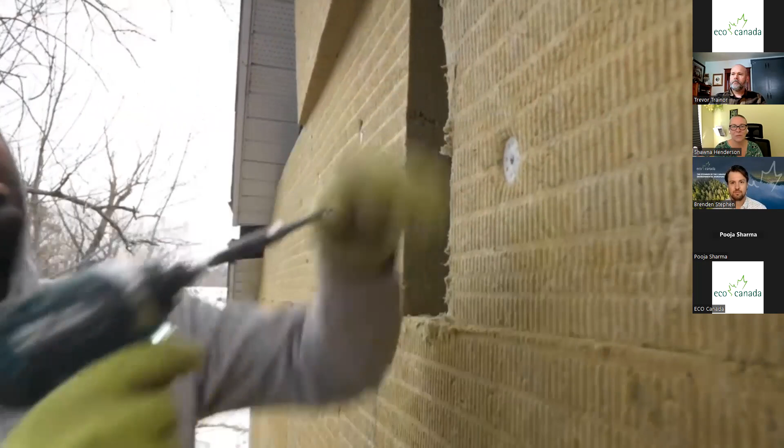Because you already know you have the best of what you have from your culture that has been passed on from your ancestors. And you have this legal prerogative. Put those two concepts together so that it'll better prepare you to meet whatever challenges may be.

Every action that one takes has to be in harmony with nature. And if we were to humble ourselves and embrace this concept of two-eyed seeing to help us mitigate some of those mistakes that have been made and that we are making, only then I believe we will be able to say I fulfilled my inherent responsibilities why I was placed here.

Two-eyed seeing offers a perfect framework for all that we're about to discuss, even the most technical aspects of our session. As your leadership team, we are grateful for Elder Albert's teaching and the way it can ground the critical work that so many communities are facing.

Awesome. Thanks for sharing that there, Trevor.

Okay, so ECO Canada is hosting this information session and this workshop. I thought we'd go over quickly what ECO Canada does. We are the steward for the Canadian environmental workforce across all industries.

Essentially, it's our job to help the environmental industry grow and thrive. We're a not-for-profit that has federal funding for wage subsidies, as well as different research projects we do. But the way to think of us is that if you're in the environmental industry, it's our job to help you grow.

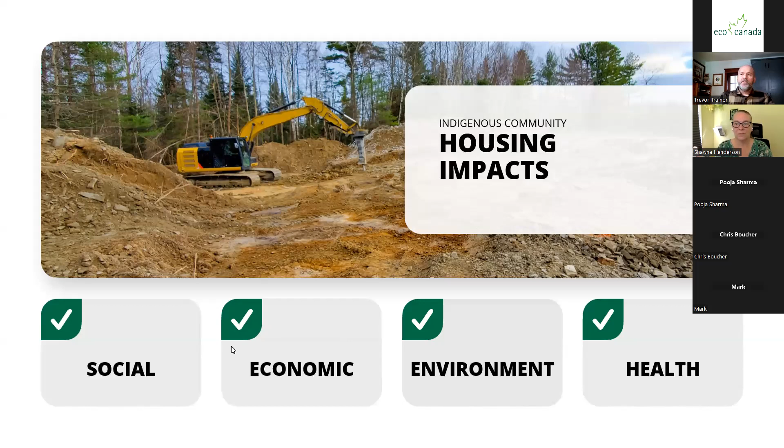So what we're going to try and do now is put the building code into context. One thing we know about housing is that a house is not just a building. Housing impacts a lot of areas of our lives. It impacts our social lives, how we interact with our family members and friends. Economically, it's very important - the cost of housing, both owning and running a home, can be very expensive, and can affect the economic parts of our lives. It can affect the environment - our home is itself an interior environment that's really important, and the building can also affect the environment around it. So it's important to understand those impacts on the environment and to create a healthy environment for us. And the last one is that our housing also affects our health - the air we breathe, whether housing encourages us to go outside or stay inside, and what are the conditions inside the house and how they affect our health. Those are all really important. So it's not just a building, it's something that affects all areas of our lives.

So one thing we like to mention up front is that building codes, the ones we're going to talk about, and codes in general, really specify a minimum acceptable level of safety. The primary purpose of building codes is life safety - specifically structure, to make sure our buildings don't fall down on top of us, and fire, to make sure they don't catch fire and put us into a dangerous situation. And if they do catch fire, how long does it take, and can we get out quickly and safely?

It's also important to remember that building codes have been developed and are meant to be applied to permanent structures - permanent homes, permanent buildings. Permanent year-round structures are relatively new in many Indigenous cultures. Over the last 100 years, in many cases, moving to year-round permanent structures was sort of forced upon us. And much of the traditional knowledge we have related to seasonal dwellings and living off the land doesn't really apply to permanent housing - it's kind of hard to apply it.

We have a bit of a knowledge gap there that we're always trying to work with. Another important issue is that communities typically haven't been consulted on the design of their permanent housing. Many times, housing designs have been taken from the South and moved into Indigenous communities, even far north, without making appropriate changes to adapt to the climate or to lifestyle differences. That's resulted in inappropriate designs and housing that doesn't last or hold up under the conditions it's exposed to.

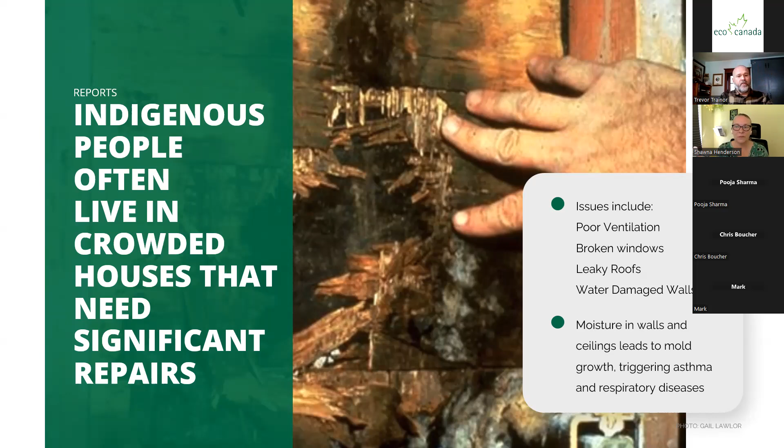Common issues we see in Northern Indigenous housing include leaky roofs, wet crawl spaces, and poor ventilation, all of which cause moisture issues and cause the building to decay quickly, requiring major repairs or making it unlivable in a short period of time. We've seen that in multiple examples. These issues, combined with overcrowding, have led to a lot of mold and poor indoor air quality issues, which have other issues related to health. Breathing in air with mold, or having mold exposure on our skin, can create health problems including asthma, respiratory diseases, and skin conditions. We'll talk about a few examples coming up.

By the numbers - I'm an engineer, so I like to see the numbers and understand them statistically. What we know from census data is that overall, 1 in 5 Indigenous people live in crowded housing. These levels are much higher on reserve and in northern communities - for example, in Nunavut territory, 60% of households are overcrowded. So we see much higher levels of overcrowding in Indigenous communities, especially northern Indigenous communities, compared to the rest of Canada. Also, Indigenous people are 3 times more likely to live in a dwelling that needs major repairs than non-Indigenous people in Canada. On reserve, and especially in northern communities, that could be up to 6 times more likely, depending on the region.

Information from the Assembly of First Nations has estimated that we currently need about 51,000 new homes to address the overcrowding issues we have. Just as importantly, maybe more importantly, we have 81,000 houses in desperate need of renovation and fixing up. So there are two issues: one, the houses we live in need to be repaired, and two, we need new housing so we can reduce the overcrowded conditions we're seeing, especially in the north.

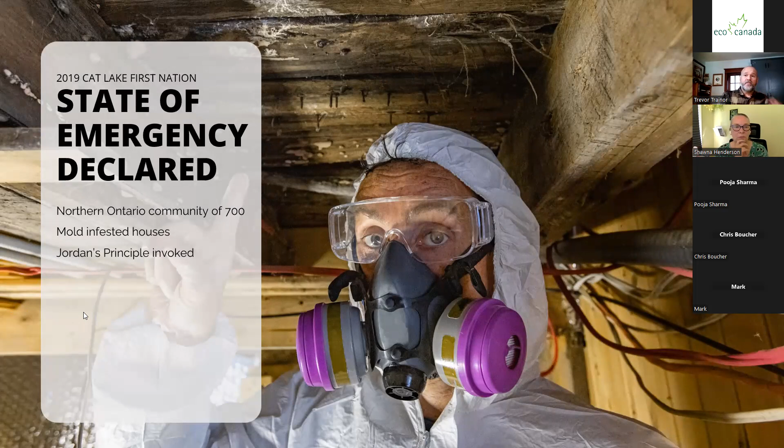So obviously this is one example, and we see this in a lot of communities on a smaller scale or a different scale, but this one got a lot of attention.

One of the things we know about overcrowded housing and housing that maybe has poor water control is that we get a lot of moisture issues inside the house. High levels of interior moisture and humidity can create issues inside our house. We've all seen condensation on a window, and that's one thing that's visible and can at least be wiped away. But the same type of condensation can be occurring inside of walls and inside of roof systems. This is the type of moisture issue we don't see, and the mold we don't see right away that's growing inside of our walls or roofs.

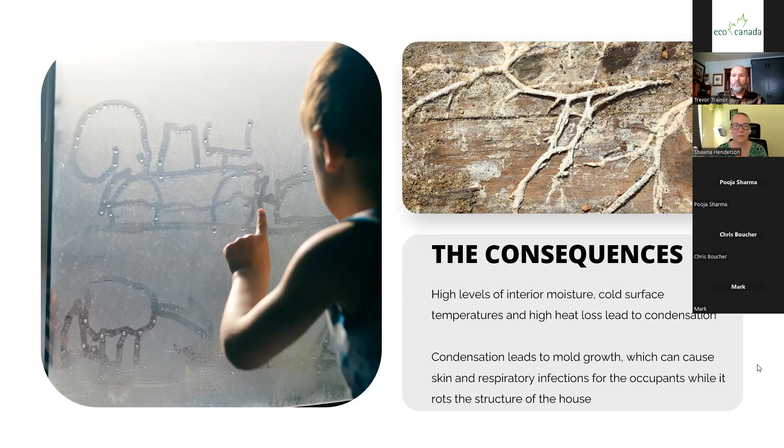So why is mold bad? Condensation leads to mold, which can cause skin and respiratory issues, especially in young people. It also results in our buildings rotting and decaying and becoming structurally unsound very quickly. Between the poor indoor air quality and the structural damage that occurs due to moisture, it's something we really need to address and take very seriously.

One of the questions we get, especially outside of Indigenous communities, is why is there so much overcrowding? One thing we need to realize is that our Indigenous communities, First Nations, Métis, and Inuit, are three of the highest growing populations in Canada. So we have a really high level of population growth, and we need more housing to house these people, to house our people.

We have a history of inappropriate housing. Over the past 30 years, we've seen a lot of inappropriate designs and poor quality construction that decays really quickly, that needs major repairs, that becomes uninhabitable after a short period of time. In the building code, typically it's expected that a house needs to perform its functions for 30 to 50 years, and in many Indigenous communities we're seeing a much shorter lifespan than that. We need to deal with that, so when we invest in housing, we're investing in something that lasts and can provide shelter and a safe place for many generations.

Due to this history and high population growth, many Indigenous households often have multi-generation and extended families living in one home, typically more people living in the home than was ever understood or expected when that house was designed.

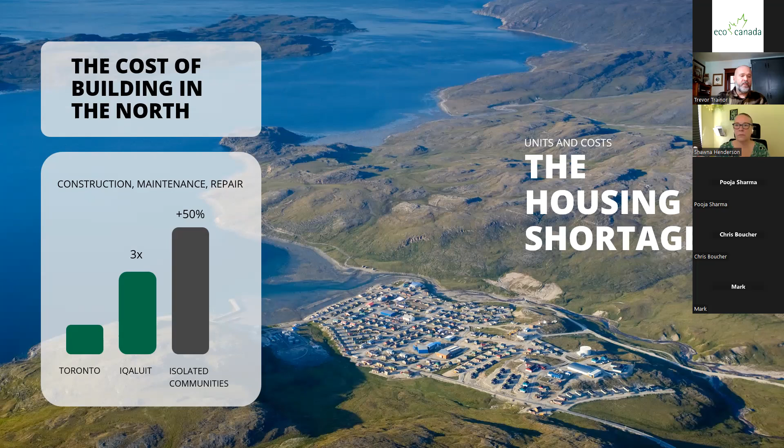The other factor we need to always consider is the cost of building, especially in the north. As we try to build new homes to address the housing shortage, we realize that building a home in the north, even in a relatively accessible city like Iqaluit, which has a major airport, seaport, and on-site labor, can be three times higher than building that same house in Toronto. Once we get into more isolated, fly-in only communities that don't have their own infrastructure or capacity to build houses and have to fly in workers, we can see housing costs another 50% higher than Iqaluit, so four to five times higher than building a house in Toronto. These are all factors we need to address when trying to solve the housing shortage in our Indigenous communities, especially in our northern and remote communities.

So how can we relate overcrowding to the building code? What we know is that moisture puts stress on a building, and the building code is there to make sure the building can take the stresses we're putting upon it. People who live in homes generate moisture, and the more people that live in a home, the more moisture they generate. So buildings need to be designed and built to manage this moisture. If we want to avoid mold growth and premature rot and decay of our buildings, we need to design our buildings to handle that amount of moisture.

The existing building codes make some assumptions about the occupancy level of homes that may not apply in your community, especially if you are in the north, in the far north. So we're going to talk a bit about that and other examples of where we might need to go above and beyond code at times.

Fire obviously is a major issue in Indigenous communities, and it's really important from a code perspective. House fires have long posed a major safety risk for Indigenous communities. In 2021, after several fatal fires on Ontario reserves, it was reported that the Ontario Chief Coroner described fire deaths on First Nations as jurisdictional neglect. So, whose jurisdiction is it, and how did they let that slide?

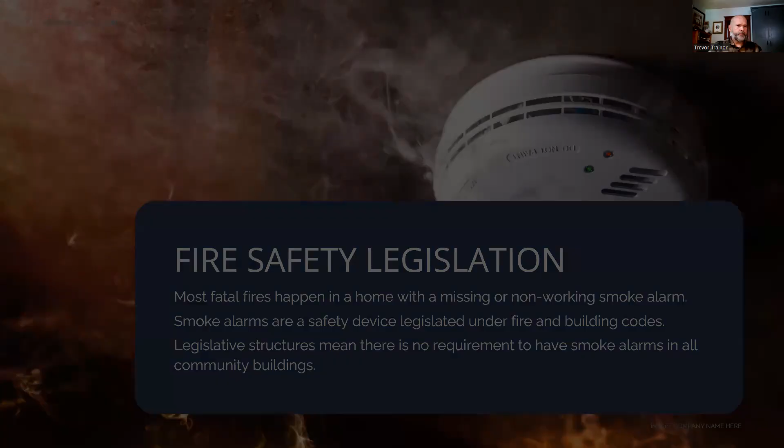So now we're going to get into, at least first, the National Building Code of Canada. Up until the past few decades, building codes were focused only on life safety issues, right? Fire and structural. And codes were often perceived as just a set of rules. You just have to follow the rules when you're building or you're renovating. But things are kind of changing, as we'll talk more about as we get into more modern versions of building codes.

So starting in 2006, Canada shifted to what is known as an objective-based building code. In that type of code, every technical requirement must achieve one or more of the stated objectives in the code. So instead of just laying out a bunch of rules, we're starting with these objectives for the code.

So there's 5 objectives. First one is safety, obviously very important. We talked about that. Another one is health. So then we start talking about the types of materials we have in the building, the type of ventilation systems and stuff like that get handled under health. Accessibility: how can we get safely in and out of the building? How can we accommodate those who have mobility problems getting in and out of the building?

Number 4 is more structural and fire. And the 5th one, the one we're going to talk probably more about, is what they're calling environment. That includes a lot of things, including energy efficiency, which we're going to talk a lot about, and indoor air quality. They fall under the environment category.

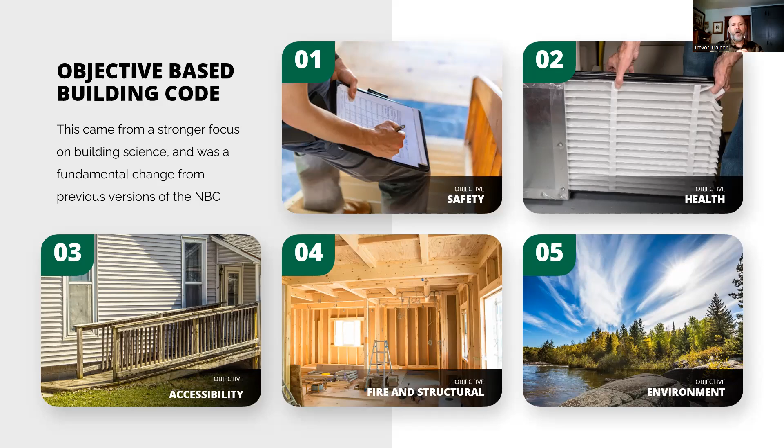So since 2006, the building codes have changed quite a bit, especially under that last objective, environment. Energy efficiency measures were added to the code and included a performance path to compliance. So instead of just saying you need to have R20 walls, they're saying your building as a whole needs to perform in a certain way to meet the building code.

So as we move from these prescriptive-based codes, like thou shalt have R20 in your walls, to performance-based codes that say the building must be built in a way to meet certain energy requirements, we start to have more flexibility in how we design buildings and how we get to the end goal of the building code.

As we move through time, the National Building Code and the National Energy Code for Buildings are now moving towards a tiered code system. The tiered code outlines a minimum energy performance, like the regular code, but also different levels of performance that exceed the minimum level. So instead of just giving one acceptable answer, there's the minimum, and then there's several above and beyond code solutions.

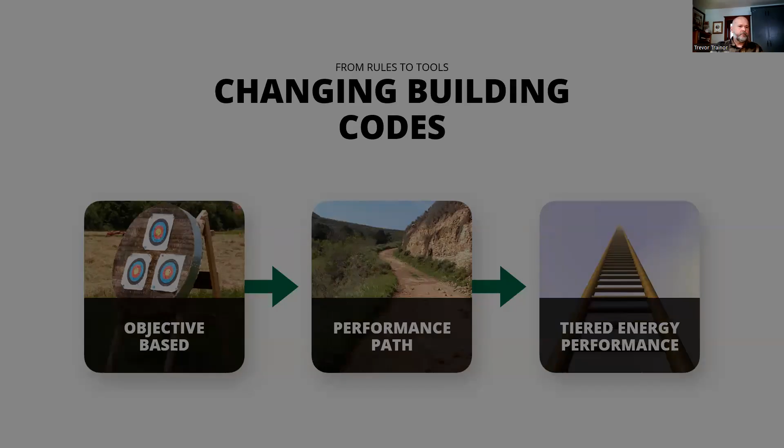So just a short history, taking a step back a bit in the history of building codes. The first building code that was ever discovered was from 3,500 years ago, from the Babylonian Empire. Obviously, they were thinking about these things as communities and as societies get more complex. They start to realize that there needs to be standards for these things.

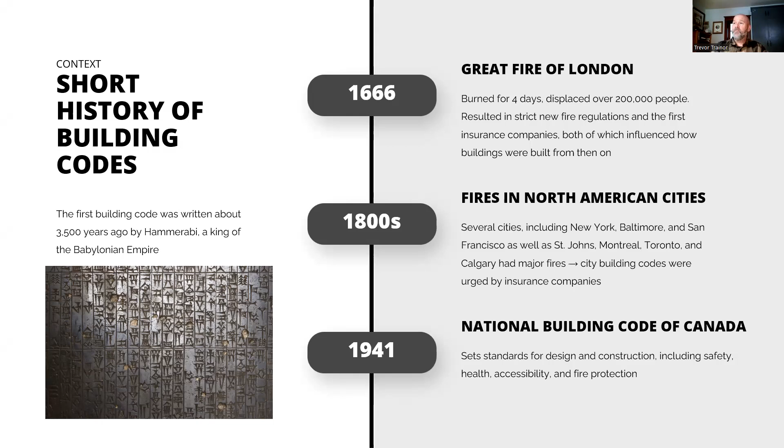In 1666, the Great Fire of London was a major driver to creating a fire code for large cities. The Great Fire of London burned for 4 days and displaced over 200,000 people. The result was strict new fire regulations, and it also brought insurance companies into the equation, both of which influenced how buildings were built from then on.

In the 1800s, several cities, including New York, Baltimore, San Francisco, as well as some Canadian centers like St. John's, Montreal, Toronto, and Calgary had some major fires, which brought codes to the forefront and produced the development of city-based building codes, again brought on by insurance companies. You'll see that as a recurring theme, that as the insurance companies get involved, they realize that standards need to be higher on how we build homes.

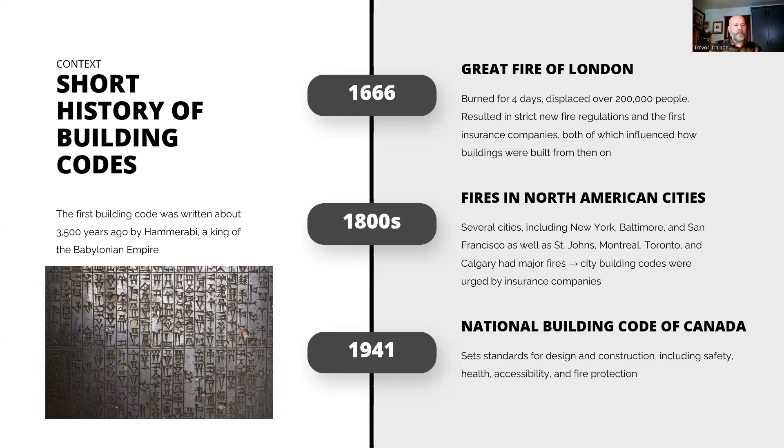And finally, in 1941, we get into a more modern version, and the National Building Code of Canada was developed. It set standards for design and construction, including safety, health, and accessibility, as well as fire protection. So now we're starting to bring more elements of the building design and performance into the building code, not just fire safety.

So currently, there's 5 model codes. We call them model codes because, the way this is legislated, the government of Canada can't force these codes onto any jurisdiction, but they provide them to be adopted by the jurisdictions, either as they are or with modifications.

So the model codes currently are the National Building Code, which we're going to talk mostly about, the National Fire Code, the National Plumbing Code, a separate code for farm buildings, and the National Energy Code for Buildings. The difference really is the National Energy Code for Buildings was written specifically for larger commercial buildings and high-rise buildings, whereas the National Building Code includes energy requirements within it for housing. We'll talk more about that.

Yeah, so why are we going with model codes? I kind of talked about how the federal government creates these model codes, rather than legally enforceable codes. The complicated side of it is that the Constitution of Canada gives the provincial and territorial governments the authority to enact these laws and regulations that pertain to buildings and facilities.

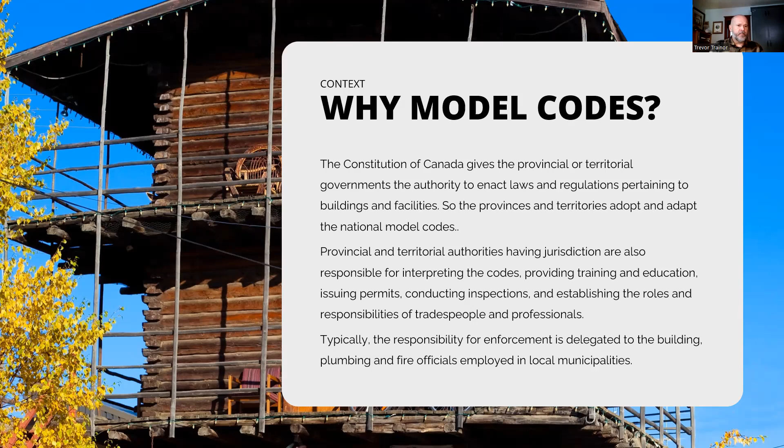So yeah, lots of layers and legal reasons as to why we're here today. We won't get into too much of that. What we will do is talk more specifically about the National Building Code. So the National Building Code has been broken down into 9 parts. Essentially, the first 8 parts, getting through some of the definitions and general requirements, we get specifically part 3, fire protection, occupant safety, part 4, structural design, part 5, environmental separation, part 6, heating and ventilation, part 7, plumbing, and part 8, safety measures for construction sites.

Okay, all of those really apply to what we call part 3 buildings, which are larger buildings than housing typically. So some high-rise apartment buildings would be in that, but most of the housing in our small communities would come under part 9. So part 9 is a little bit of a standalone for housing and small buildings. It includes all of the things in the other parts, but makes them simpler, more applicable to small buildings like housing and other small commercial buildings. So typically, if we're talking about housing and NBC, we're talking about part 9.

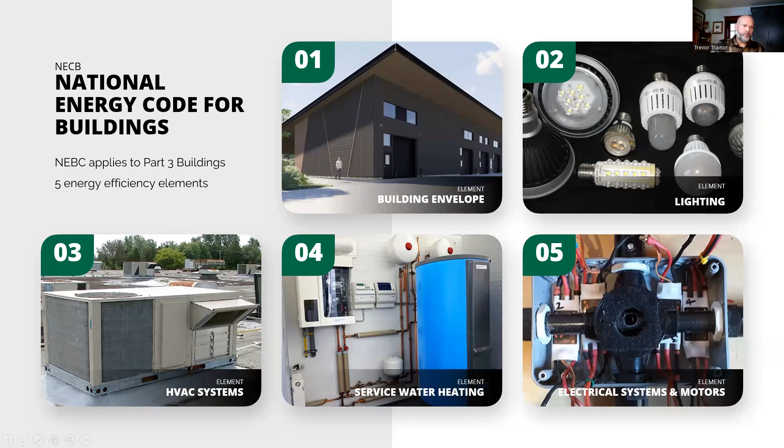Quick timeline for the National Energy Code for Buildings. It was developed by the National Research Council of Canada in 1997, while working with the provinces, utility suppliers, and industry stakeholders. So it was released in 1997.

There's been several updates along the way. In 2011 and 2017, updates were added to increase some of the minimum requirements and also to add more flexibility in how the code gets adopted.

And in 2020, this is a big change: we've added that tiered approach. So now there's not just a minimum that's laid out, there's a minimum and there's higher tiers or higher levels of energy efficiency that are in the code, again, to help promote going above and beyond code, and also to provide that roadmap to the future so that we can continually improve the existing code.

So why is energy efficiency important in buildings? Well, one of the reasons is that residential buildings alone, that's the light blue on the donut here, accounts for 13% of our total energy use in Canada. That's a pretty big chunk of our energy use that we can improve and reduce energy on. Similarly, for greenhouse gas emissions, buildings land right around 13% of our total greenhouse gas emissions nationally. So making improvements in housing can make a big difference to our overall greenhouse gas emissions.

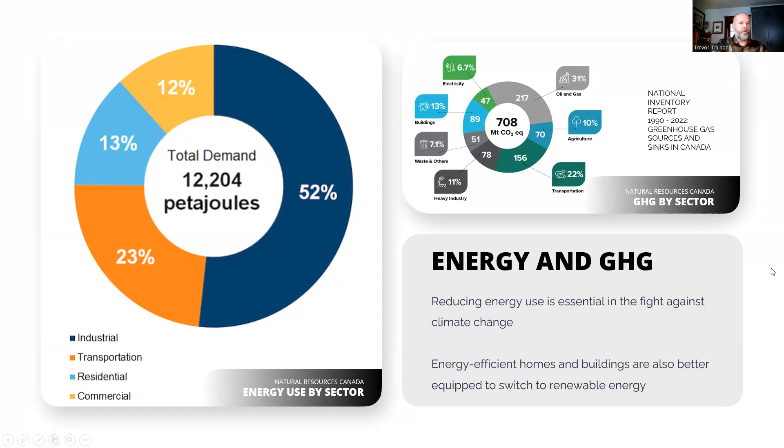Also, creating energy efficient homes and buildings with really good building envelopes and building enclosures makes it easier to switch to renewable energy for heating. That's really an important step in the process too, as we try and move away from fossil fuels and move to renewable electric energy. This is one of the ways we can do that.

So now as we move forward in time, we're looking at what the next version of the National Building Code is going to look like. In 2019, the Standing Committee on Energy Efficiency laid the foundation for a net zero energy ready model building code by 2030.

A net zero energy building is a building that can produce as much renewable energy as it consumes. Typically that's done with solar panels on the roof, and there's some exceptions where we get into wind power and other things, but typically that's done through on-site solar photovoltaic electrical generation.

According to Natural Resources Canada, they expect that a net zero energy house would be 80% more efficient than something that's built to today's building code minimums. Once we get 80% more efficient, it becomes easier to produce enough renewable energy right on site to meet the needs of the house.

Now we're seeing a lot more focus on net zero energy ready buildings. A net zero energy ready building means it's designed, modeled, and constructed the same as a net zero energy building, but it doesn't yet have the renewable energy system. It's available in the future, especially as we get more efficient solar panels and other renewable energy sources. Having the building ready to take those and move to a self-sustained net zero energy building is really important.

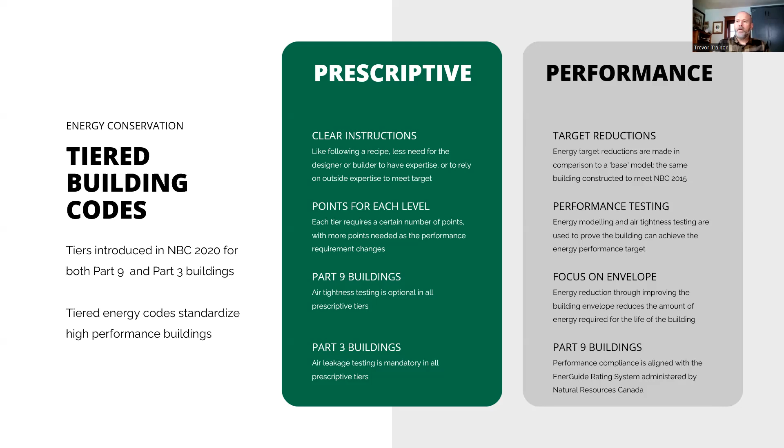With the performance-based part of it, we're really focusing on the building envelope as well—making sure that regardless of how you're handling space cooling, heating, and ventilation, the building itself is what makes it energy efficient.

That's an interesting approach too, because certain parts of the building are assumed to be permanent—like your walls, roof, and floors—whereas other parts, like furnaces, heating systems, and cooling systems, are assumed to have a 30-year lifespan and get swapped out over time. So having a really good building enclosure means that in the future we have more options for what heating and cooling systems we use, and what types of renewable energy we generate.

Next, we're going to give one example of how codes are enacted. This is a bit complicated because there are various legal frameworks involved, but we can summarize how the National Building Code of Canada gets revised and updated every five years. Each version of the code can be adopted and adapted by each jurisdiction, primarily provincial jurisdictions for the most part. So it all starts with the model code.

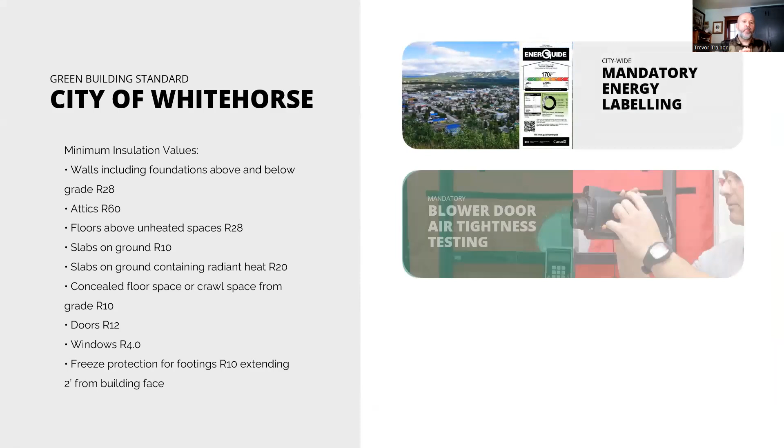Another example of a municipal level green building standard was enacted by the city of Whitehorse. This is a much simpler approach. Basically, this bylaw addressed some of the specific local building issues that they were having in the city. This bylaw requires that all new houses have an EnerGuide rating.

EnerGuide is the rating system recognized by Natural Resources Canada, and they have to meet a minimum standard for that. The other thing that's really interesting in this approach is that the city of Whitehorse's bylaw requires blower door air tightness testing of the buildings, and also requires that the buildings meet a certain standard, which is 1.5 air changes per hour at 50 pascals.

What they realized from the past was that even when we start making buildings more well insulated, we can still have moisture problems if we don't have proper building air tightness. And they've legislated that above and beyond the National Building Code. I visited Whitehorse a few months ago and spoke with some builders, because my experience in Ontario is that builders would have a real problem with this.

Speaking with the builders there, they adapted to it very quickly and are having great success with that, regularly exceeding 1.5 air changes per hour by quite a bit, making their buildings more airtight than required.

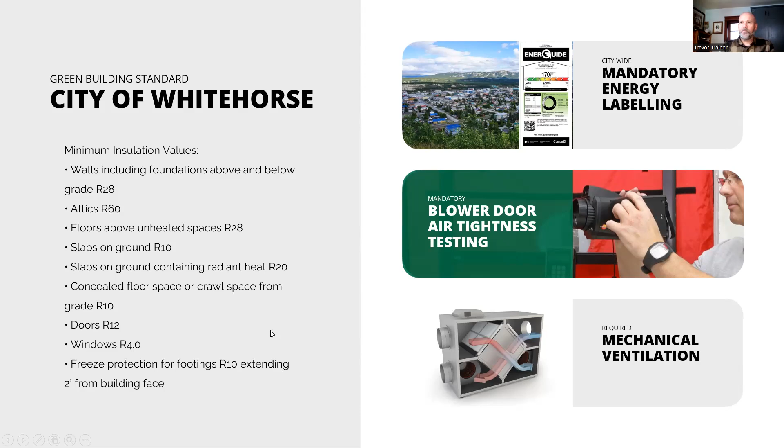There's a few other requirements listed here, including freeze protection for footings and other issues, where windows require a minimum of R4. So issues that they've noticed and found over the years, they've tried to address in their own local bylaw. I think this is a good model as to how a community could address this using their building bylaw type setup.

Now we're going to talk in a little more detail about the BC Energy Step Code, because it relates a lot to the upcoming National Building Code we talk about.

The BC Energy Step Code was developed in 2017 to create a pathway to net zero housing by 2032. So their goal was to take this code, create these different steps, and by 2032, get all new housing to the level of net zero ready.

There's a range of effective insulation levels for the foundations, walls, roofs, and window performance, etc., for each climate zone, which I'll show you in a minute. There's an air tightness requirement, and the insulation values all increase with each step, so we need to become more airtight. Higher levels of insulation are required to reach each step.

Mechanical systems must meet higher efficiency ratings as we move into colder climate zones and as we move up the different steps and tiers. This is for Part 9 buildings specifically. Because of the performance-related way that this can be adhered to, it allows designers and builders to choose the appropriate approach that works for them, that meets the requirements. They're using much less prescriptive approaches and much more performance-based approaches to achieve this.

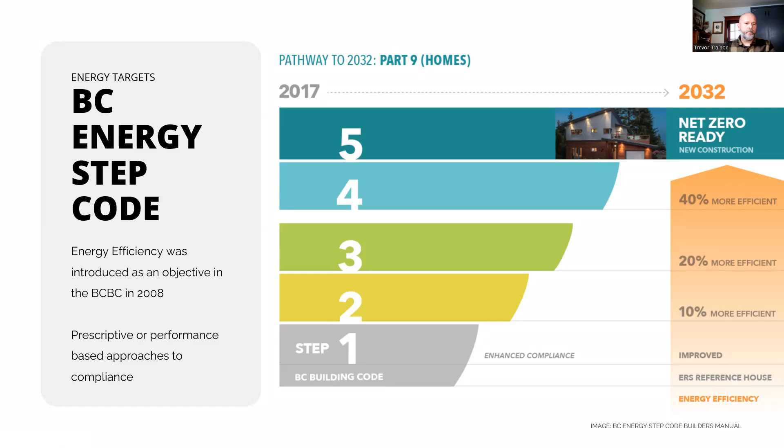And you'll see this in the building code, there's a huge table of heating degree days for basically every major center in the country in the National Building Code. And basically the heating degree days jump up by about 1,000.

So for example, climate zone 4, which is just Vancouver and Victoria, is less than 3,000 heating degree days. Climate zone 5 is 3 to 4. As we move up, they move about 1,000 at a time till we get up to, for example, 7B, which is 6,000 to 7,000 heating degree days. And then finally, climate zone 8, which is greater than 7,000 heating degree days.

So one thing about climate zone 8 in BC, it makes sense that it really can be its own climate zone. As we look overall in Canada and into the high Arctic, we can see certain communities that have 10,000, 11,000 heating degree days. So climate zone 8 can be quite different from its warmer to colder zones. But within BC, it works really well.

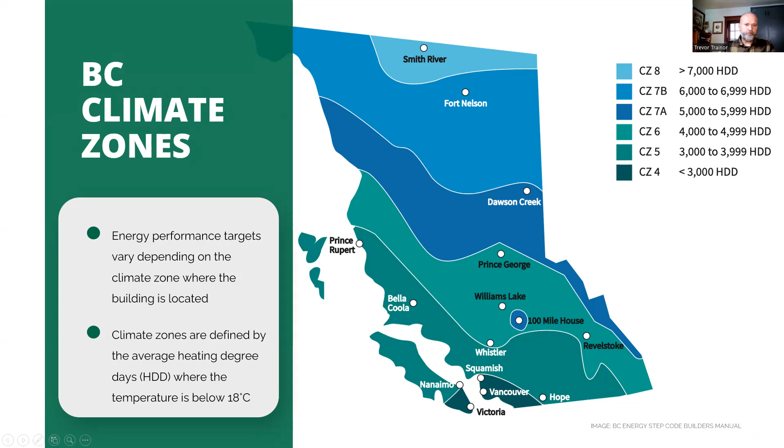So the reason BC adopted their step code was in anticipation of the National Building Code 2020, which introduced the tiered approach to the national code. So it has a tiered approach to energy performance, again, based on our requirements or commitments from the Pan-Canadian Framework on Clean Growth and Climate Change, which is a set of targets that call for working towards net zero energy buildings by 2032. And as we know, a net zero energy building is one that produces as much renewable energy on site as it uses.

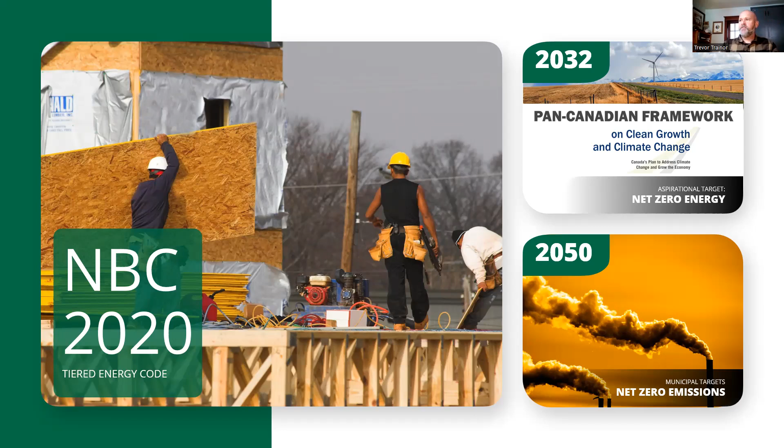So the Model Energy Code for 2020 has 4 levels. It has a base level. The base level is the starting point we're using, and very much related to the previous building code. That's based on NBC 2015. That's where the base, that's what everything has to start at, and only get better. And that's the way designers are used to designing, builders are used to building now.

And then it adds these different tiers. So tier 2 would require a 25% improvement in energy efficiency of the buildings. So far, tier 2 has been adopted by Saskatchewan and the Yukon, but not all provinces and areas are working to that yet. Step 3 of the model code requires a 50% reduction in energy efficiency, and step 4, 60%. And so the idea being step 4, when we get to about 60% reduction or improvement in energy efficiency, now we get into the zone where we can possibly create enough energy on site and get to that net zero energy performance.

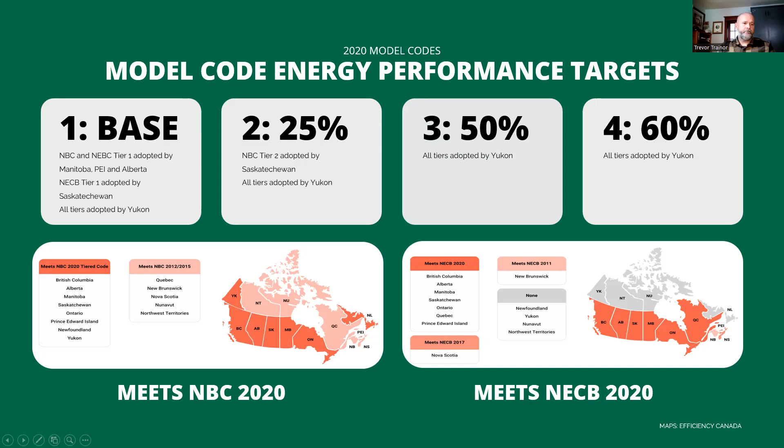What's coming up next? Now we're going to start to see codes that go beyond just energy efficiency, but start to look at carbon emissions. The zero carbon step code was introduced in 2023 as an update to the BC building code. So you can start to get the impression that BC kind of leads the way on these code issues related to energy efficiency, and where they're going next is to not only think about energy efficiency, but carbon emissions reductions. The low carbon code provides several options to reduce the amount of operational carbon emissions from a building by...

...lowering the emissions from space heating and water heating systems. So primarily that means you can only go so far with energy efficiency on heating systems and water heating systems that use fossil fuels. So that really means we start to switch over to electric-based systems and then make sure that we're able to create that electricity with renewable resources like solar and wind power.

Upcoming in the code will be applying the step code to alterations to existing buildings, so renovations code. So a new section of the building code is being developed, and they're looking to adopt it by 2030 to fill the gap in energy conservation and building science when it comes to improving the existing housing stock.

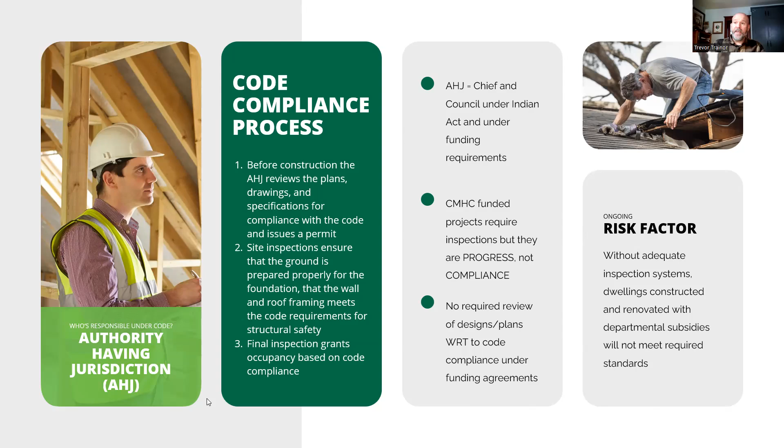So we need to figure out a way to get these 3 steps into your process. Since 1983, all government funding agencies require that new housing is code compliant, but they don't do the inspection for code compliance. As we said, it's a responsibility of the community to do that.

And as we know, poorly built housing, whether it's from the design or construction side or both, increases the risk of fire, structural decay, and the need for repairs. It also affects occupant health and indoor air quality because of moisture and mold and all those issues we talked about. So we know that inadequate and inappropriate buildings have consequences in our communities.

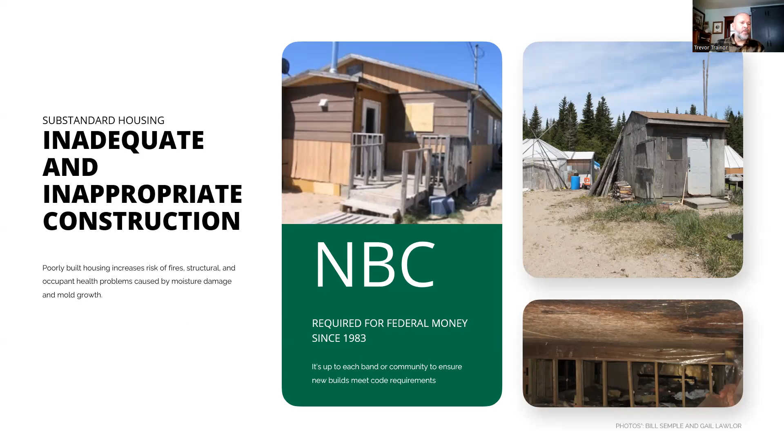And we want to make sure that we have a way and a process that works for us, to make sure that at least new housing, and when we renovate housing, that it gets done properly. And the code is one way we can do that.

So we talked a little bit about capacity. Shauna mentioned that not every community has a building inspector. Not every community has skilled trades that can follow the plans, or someone to read the plans and know that they meet code. And that's when we get into other structures outside of individual communities.

So one method that a lot of communities are using to adopt the code is through tribal councils and their technical departments. This allows for building code specialists, building inspectors, and other experts to serve multiple communities in the same region. One example we'll talk about is Ogemawahj Tribal Council, also known as the Six Nation Alliance. You can see the communities that are involved in that.

So the OTC, the Ogemawahj Tribal Council, provides guidance, assistance, and advocacy for its member communities in relation to all types of community infrastructure, planning, and development, including housing. So this includes advising and assisting member communities on housing inspections, building code inspections, plan inspections, even the tendering process, and other technical needs when it comes to developing housing.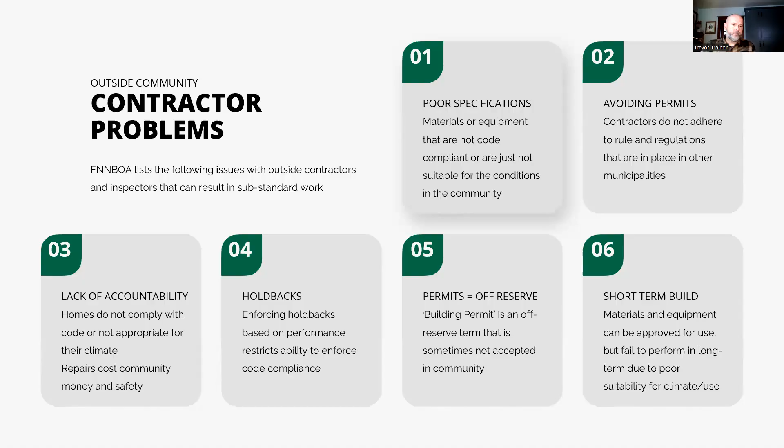Also, just to note, we're going to talk a lot about energy and focus a lot on the energy benefits with building codes. There's also a lot of other important benefits that come with the adoption and adaptation of building codes. And these are the things that we really prioritize in our housing, like safe and healthy housing, right? Those are the 2 primary ones. We want people living in their house to be safe and healthy. Their house should not be making them sick. We also can use the code to improve the durability of our buildings, to make them last longer, to have lower maintenance, and to provide shelter for 50+ years if they're designed and built properly.

And finally, resiliency. So our buildings can be designed to withstand different natural disasters potentially, or high wind events, floods, fires. All those things can be addressed using the building code. If we know what our priorities are as a community, we can use the code to help us develop resilient housing too. So these are all called non-energy benefits, and they all stem from energy efficiency work.

But the cool thing is that we can turn it around and say, we can build comfortable, safe, healthy, durable, resilient houses. And by the way, they're going to save you some energy. It becomes a bonus point as opposed to the actual reason why you're creating a high performance house. Right. And that's kind of cool, to turn that whole thing on its end. And that's why we can use the code to drive home as a refuge.

We'll talk about. Yeah, and again, we're about 5 minutes away from the top of the hour. So just for timing, yeah. Wow. Okay. I would suggest that we kind of zip through the next few slides, because this is more focused on

this idea, but it's important, the idea that you are the authority having jurisdiction. And then we can build into that the idea of sovereignty, but I really want to get us into some of those good juicy examples that we got coming. Yeah, absolutely. So because the community is the authority having jurisdiction, we can use that as a benefit to really create our own sovereignty within the community on how housing gets designed and built. That's really the point of this slide.

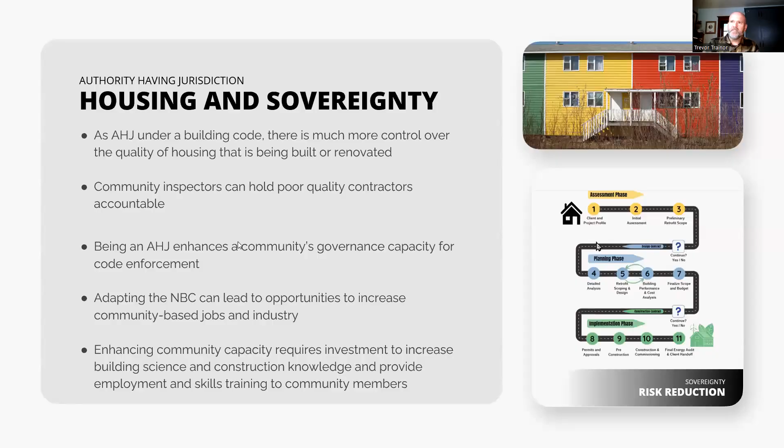And then we can maybe get a little bit into this before break, which is all about the house as a system and using our knowledge of building science to help us work with the code and create that healthy, safe, durable building that's also energy efficient. Yeah, for me, this is the part of this that is the two-eyed seeing. Sorry, tumbled up on myself there.

The building code, the high performance building codes, are based on building science. So a lot of the building science is cooked into the code, and now you can take that code and you can build it further. You can build out into healthy, safe, durable, resilient by using building science, which is also backed up in the building code.

Absolutely. And when we talk about the house as a system, we're saying that all the things are interconnected and affect each other. So the occupants, for example, are part of the ecosystem of the house and affect how it performs. So is the building envelope. How are the walls and roof and windows designed? Same with the mechanical systems. And if we change one, how does it affect the other?

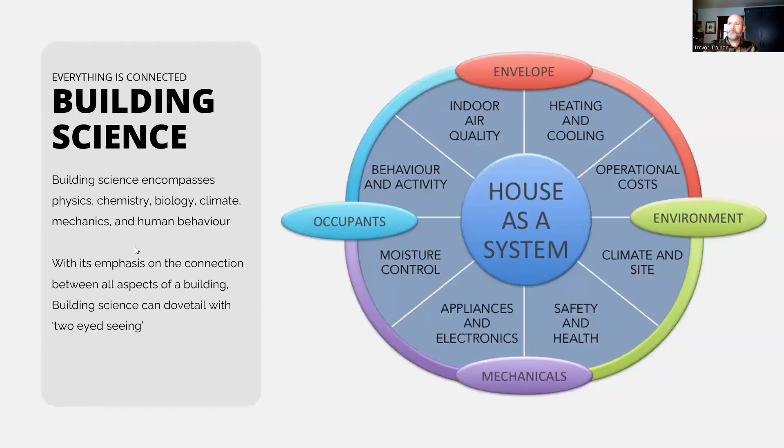So real quick on this one, the knowledge we have in building science, we're actually very lucky in Canada because we have a long history of building science research. And the Saskatchewan Conservation House was one of the original modern versions of a high performance house based on building science. We won't get into all the details of it, other than it was designed to be highly insulated, have passive solar design. It also has an active solar system and heat recovery ventilation system. And so those were all very new concepts at that time.

The other thing that is also really important about the Saskatchewan house is it made us realize how important the air tightness of the building enclosure is. So maybe I'll get through this little section and then we'll have another break.

And so when we talk about air tightness of buildings, sometimes we talk about the energy benefits of that, because we can lose a lot of heat and energy due to a leaky building. But there's also a lot of other important benefits to having an airtight building enclosure. And those are mostly related to condensation and moisture issues and mold growth.

The way we test a building for air tightness is with a blower door. It's a really important tool that we have to test buildings, because if we don't test a building for air tightness, we don't know how airtight it is, and we just kind of have to wait for it to have problems or not. If we test it ahead of time, we can head off those problems before they occur.

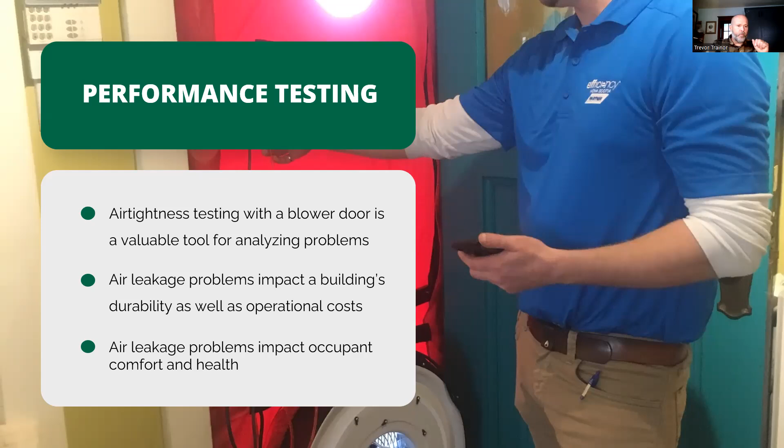I guess it's also really important to know, just jumping back quick before the break, that air tightness affects not only energy, but more importantly occupant comfort and health, because of that condensation problem we talked about. Especially in cold climates, even a little bit of air leakage into a wall or roof system can move a lot of moisture in and create mold, rot, and decay. So air tightness is really important, a building science principle we need to address when talking about healthy, durable housing.

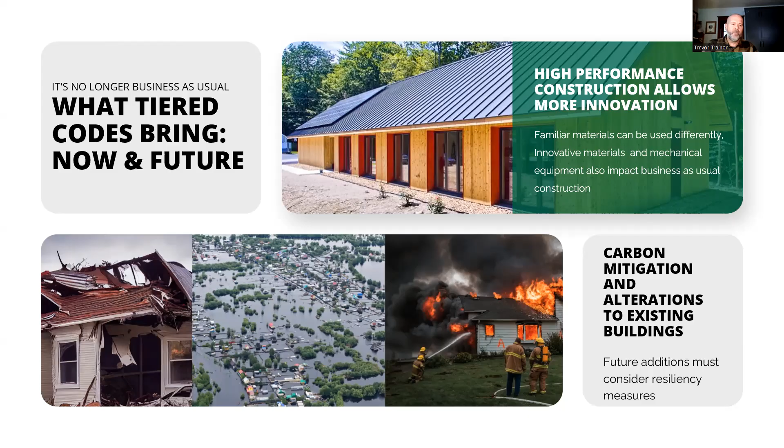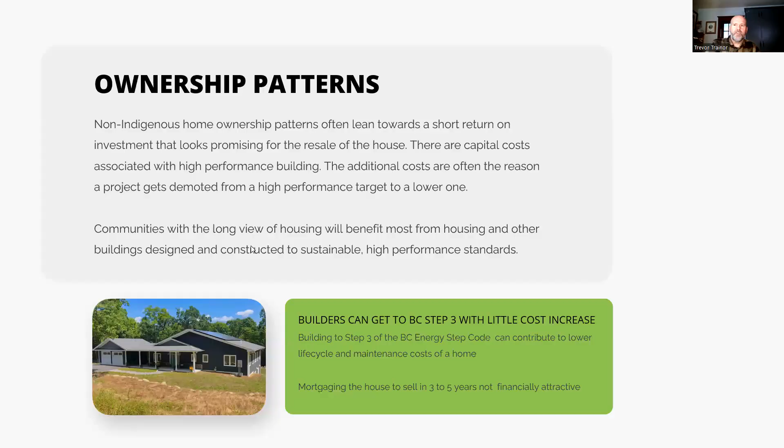In terms of retrofits, there's a European movement called Energiesprong, which is retrofitting houses to net zero in bulk. It works in Europe because there are similar community ownership patterns. So that's another piece to look at outside of code, but a very interesting one.

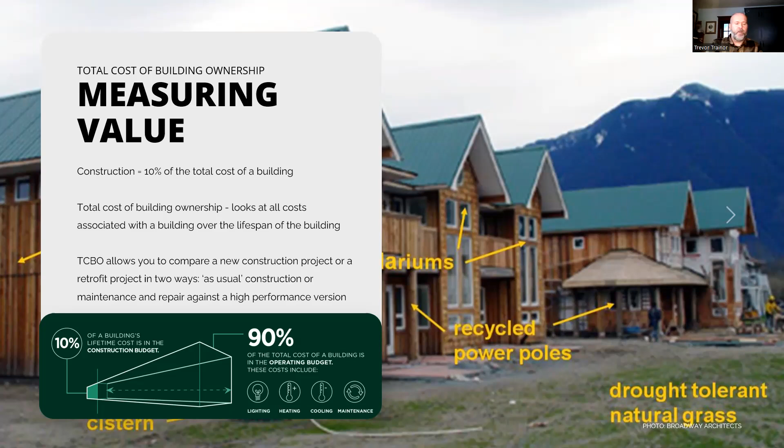Another thing is just trying to understand the actual cost and value of a house. It's important to know that construction is really only 10% of the total cost of a building over its lifespan. So if we think of this as total cost of ownership—looking at all costs associated with the building, including energy use, maintenance and repair—we can make different value judgments and decisions, maybe spending more money up front on design decisions that save money in the long term, knowing we're going to own and operate this home for 50 plus years.

Now we can do a quick case study of Seabird Island. In 2002, an early showcase of sustainable housing was built by First Nations on Seabird Island. Some of the sustainable building features fit traditional learning and cultural ways, like living light on the land, using local materials, minimizing energy use, and optimizing for renewable energy. The homes were designed to benefit from solar positioning, wind patterns, and even earth energy. The main living area and solariums are oriented south in a semicircular pattern around a communal healing garden, which is the focal point of the site, showing the four directions design pattern. Just an example of one community that tried to think outside the box and take a different approach to housing—not just individual houses, but the neighborhood design too, and how it fits into the community.

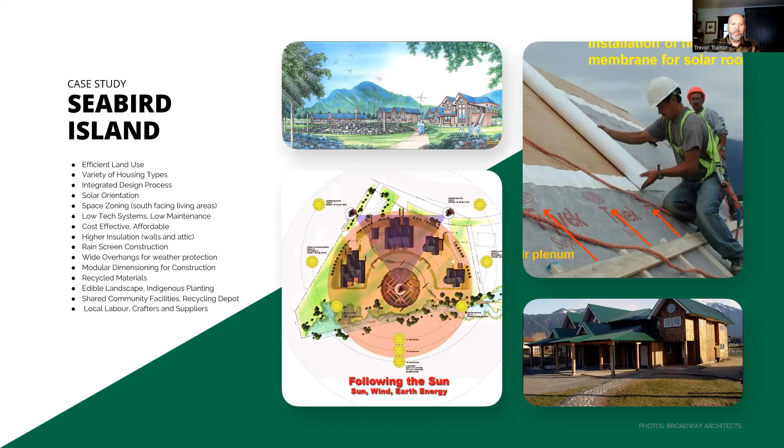Oh, did I skip one? No. That's weird.

Oh, there we go. Another example, in 2005, Northlands Denesuline First Nation, along with the University of Manitoba, came up with an architectural design starting with the question: how is our housing affecting our health? They studied this in order to come up with their own housing design. The outcome of this review was a book called Sekwe, which is Dene for 'My House,' that captures the vision, design, and creation of housing plans and specific elements to support the Dene First Nation on their path for improved health through housing. So just a completely different lens to look at it through, in terms of health, and interesting outcomes.

Another example is the Nuxalk Housing Specialist, or the Nuxalk First Nation, and their development of high-performance housing guidelines. Their advisor, Richard Hall, who has 35 years of building experience as a Red Seal carpenter, recently produced the book, or specifications, called the West Coast Building Standards for Residential Construction. This publication has been developed in partnership with RDH Building Science and David Wong of Sea to Sky Architecture.

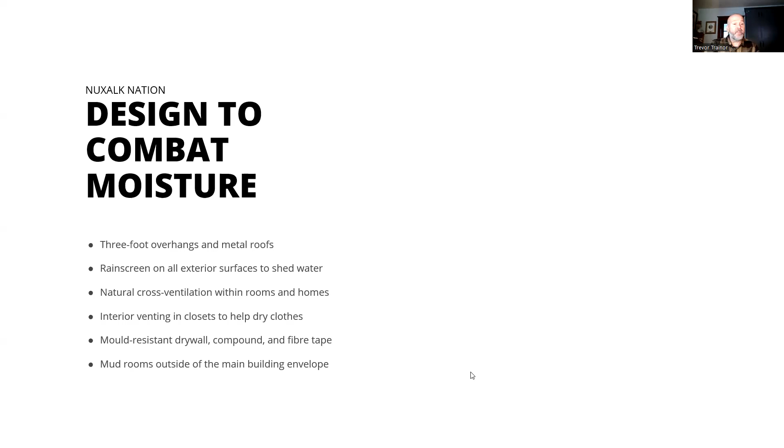A big part of this was designing to combat moisture. Obviously on the West Coast, rain is a very big issue to deal with. How did they deal with that? They started with 3-foot roof overhangs and metal roofs, a rain screen, meaning an air gap behind all their cladding and exterior surfaces to allow water to dry out and allow cross ventilation to dry walls. They positioned windows to allow ventilation within rooms, and used interior venting in closets because they were having issues with dampness where clothes were drying. They used mold-resistant drywall, compound, and fiber tapes, and a design feature of mudrooms being outside the main building envelope, where wet clothing and equipment can be stored outside of the main building.

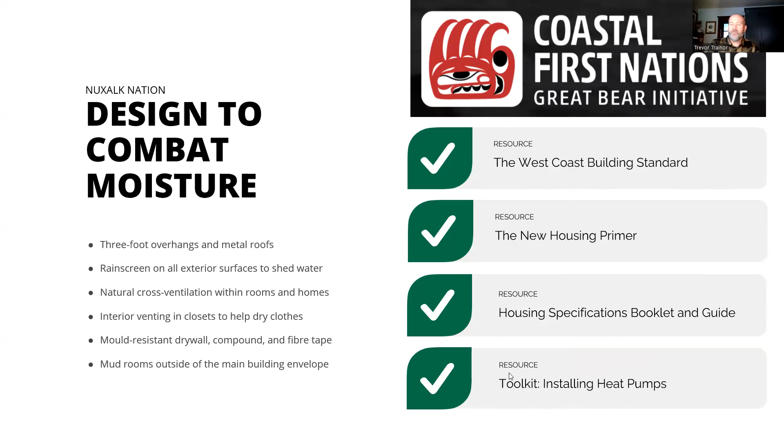So just a few resources available to you through the Coastal First Nations Great Bear Initiative. They have the West Coast Building Standard, as well as a new housing primer, housing specifications booklet and guide, and a specific toolkit on heat pump technology and how to install and design for heat pumps. Those are all available to you in the resources.

Another example we're going to talk about is Georgina Island. It's a 3,500 acre island of reserve land, which is a permanent home to roughly 200 band members, and also hosts hundreds of cottagers on their 3 islands throughout the summer. While Georgina Island was operating under the Indian Act land management regime, cottagers had been doing all kinds of things, including DIY septic systems that were leaching wastewater into the lake, which was also their drinking water.

So they realized they had to do something specific about this. After becoming chief in 1993, Bill McCue introduced the framework agreement on a First Nations land management approach, which promised to relieve First Nations of some of the constraints imposed by the Indian Act and give them more control over their land. In 1996, the band members voted overwhelmingly to adopt this land code, and it was implemented, I believe, in January of 2000 at the start of the new century. Really interesting - a way to approach not housing specifically, but housing with land under this, looking at ways to manage their lands outside of the Indian Act.

For example, we talked about home occupancy. We know that especially in the far north there's a lot more overcrowding than the code would assume. The National Occupancy Standard assumes occupancy of no more than 2 people per bedroom, and we're obviously seeing overcrowded situations with communities that have many more people living in a house than just 2 per bedroom.

It also relates to how the NBC requires ventilation for a home based on the number of bedrooms, assuming the number of occupants equals the number of bedrooms plus 1. Overcrowded conditions aren't accounted for in the code, so the required ventilation may not really apply or should be looked at more carefully. It may be necessary to specify greater levels of ventilation and look at other things to help reduce condensation due to high RH, like window specifications and whole building air tightness, to account for that overcrowding.

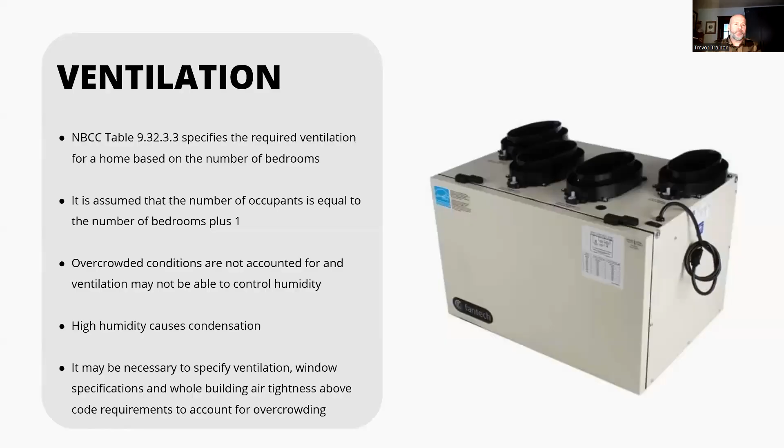Another example is vented roofs. The code states that except where it can be shown to be unnecessary, where insulation is installed between a ceiling and the underside of roof sheathing, a space shall be provided between the insulation and the sheathing, and vents shall be installed to permit transfer of moisture from the space to the exterior. The important thing is that ventilation above an insulated ceiling has been the norm and standard for over 100 years in Canadian homes.

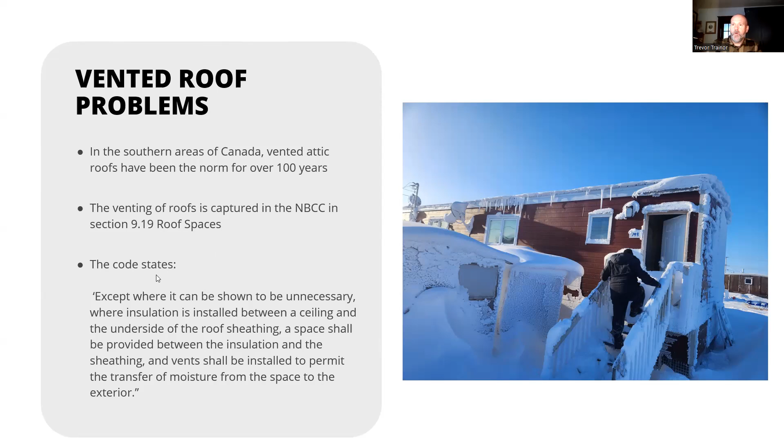But there are some issues with that in some areas, so the code may not apply for several reasons in your community. In certain communities in the Arctic, the snow is so fine and the wind blows enough that it can regularly blow snow into the attic vents, which can create moisture issues in the house. We have to worry about that.

Also, the air leakage from the house into the attic may exceed what ventilation can remove. The code assumes a certain amount of air leakage occurs between the house and the attic, but if in reality we're seeing more than that, we might need more ventilation or decide to do something alternative. There are different types of attic vents that prevent snow intrusion that could be specified in your community, and there are also unvented roof designs that can be very effective in northern climates. That's what I'm seeing more of in Arctic communities, houses designed with vented attics being converted to unvented roof designs.

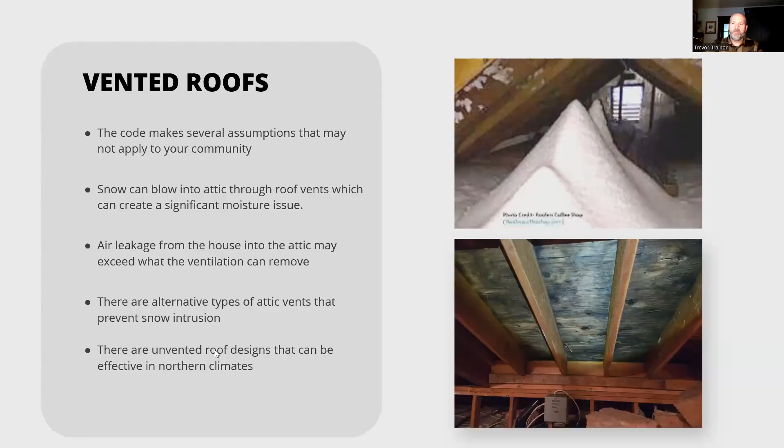So many of the recently built roofs in Nunavut are actually failing because the ventilation was removed from the design without understanding the building science of that. Remember, the house is a system, you can't just take away something without understanding how that's going to affect it. That's kind of what happened here - they knew that venting wasn't working for them in these vaulted ceilings, so they just took away the venting. Well, that resulted in air leakage, condensation, and a lot of other problems.

What we've seen in many of the older roofs in Nunavut - if you've ever seen photos like this, where it looks like the roof is a separate extended piece to the rest of the house. In the picture on the bottom, see how the gable end sticks out further. The reason it looks that way is that is not how it was originally built. It was originally built with a vented attic, but that is added exterior insulation that was added to the gable ends and to the top of the roof to convert that from a vented attic to an unvented attic. And those, under the ones that I've reviewed, are actually performing very well from a moisture standpoint.

So again, understanding that house as a system and using building science, we can actually create unvented attics and use that little slice of the code that says venting is required unless it can be deemed unnecessary. In cases like this, we can show that venting is unnecessary if it's designed properly as an unvented roof.

The thermal envelope and the amount of insulation that's specified is actually addressed relatively well within the building code. The NBC section 9.36 specifies different minimal insulation levels for different climate zones. As we know, each of these climate zones has different minimum requirements for wall, roof, and foundation insulation levels, as well as window performance, with the colder climates requiring higher levels of insulation.

That's primarily done for energy purposes. One thing to note - we talked about how each of these climate zones is a 1,000 span of heating degree days. However, zone 8 spans from 7,000 heating degree days up to 11 or 12,000 heating degree days. So having that as one climate zone might not be appropriate for certain parts of the building code. If you live in Iqaluit and you're designing homes, you may want to go above and beyond the building code in certain circumstances. So although the code does address climate in that way, there may be some areas where local conditions are different than what's addressed by the code.

Building to minimum code has its cost, right? It's probably the cheapest upfront cost for building. But as we said before, there's more to the cost of owning a home than just the upfront cost. Building to minimum code really does result in higher energy use for the entire lifespan of the building. It may result in a shorter lifespan of the building in terms of moisture damage, rot and decay, and mold growth just by building to minimum code. So we always look at the best places to spend our upfront money and go above and beyond code so that we can improve the durability, and improve the health and safety of the building. Remember that upfront cost is only a small portion of the cost of the home, and there is a high cost to building to minimum code in some cases.

How communities use buildings is also not dictated by the code. Some traditional practices and cultural uses of buildings were not accounted for by building code requirements that were informed by non-Indigenous practices and uses. There's opportunities for Indigenous communities to adapt building science-based codes to create guidelines and learning paths that reflect local knowledge and the cultural uses of the building, while at the same time enhancing and maintaining comfort, health, safety, and energy efficiency. So making a series of best practice decisions by blending local knowledge with building science is something that I think, moving forward, using the code the way it's set up, can be done and can be very useful to build to the way the buildings are being used.

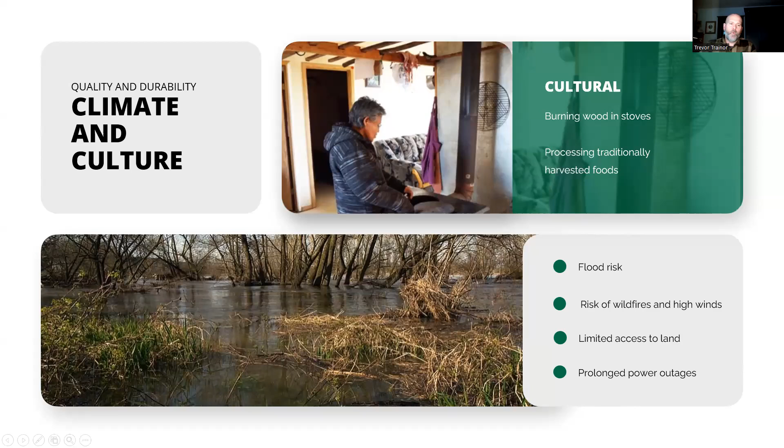So all of these things can be considered when we're looking at developing culturally and climate appropriate housing, and we can use these flexible building codes to do that.

As we move towards new and less prescriptive building codes, we're able to utilize more creative solutions and incorporate higher performing levels of the tiered codes that produce houses that are safe, affordable, and efficient.

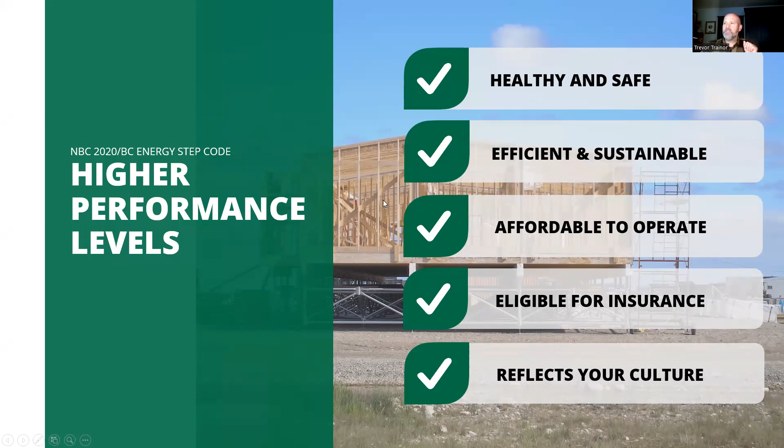Again, thinking about the total cost of ownership of these homes, not just the upfront cost, and how they'll affect the budget of the community in the long term, are also really important and help us make those proper decisions, maybe to spend more upfront to have more durable, more efficient housing.

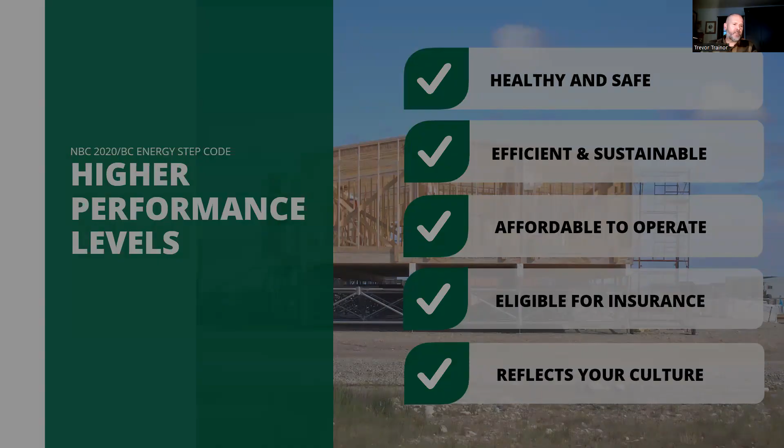We can also look to local solutions using these performance-based building codes that benefit the whole community. So we can look at different housing types, not just a bunch of 3-bedroom homes, as we talked about—maybe larger homes, maybe smaller homes, depending on the needs of our community.

Homes built with materials produced within the community, or locally within neighboring communities or the local area. Homes built by qualified community members or members from neighboring communities who have the proper training and experience from this capacity building we're working on.

And then finally, resilient homes that are built to last a long time. It's really important that we're passing down our housing from generation to generation and not just replacing it after 10, 15 years, as some communities are experiencing now. All those are really big community benefits, not just to the individual who lives in the home, but to the whole community, and also just taking a long-term look and thought about community management.

So the adoption and adaptation of high-performance building codes is one step to help break the cycle in order to create homes that are healthy, durable, and efficient. Not just thinking about how can we get more housing units quickly, but how can we get housing units that will help break this cycle and last a long time and benefit the community for 50 to 100 years.

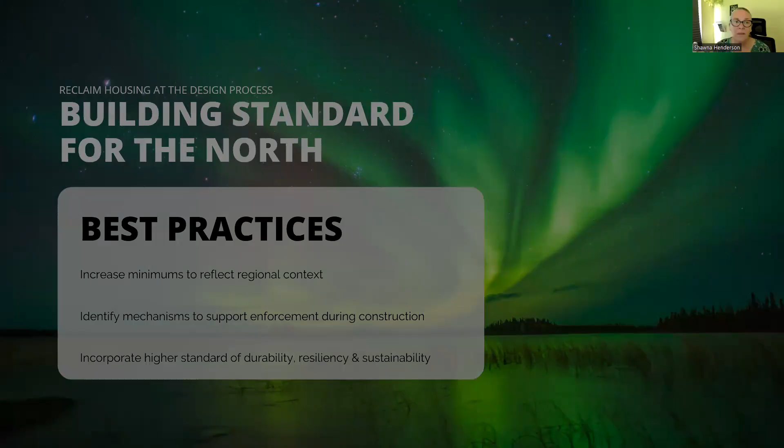So the result of this process can be a higher standard of construction to meet the specific needs of your community, and utilizing the tools that we have, including the modern National Building Code and how it's set up to meet your needs and to act as a resource for you. Trevor, I just wanted to pop in and say that NAN is a really interesting example, because if you can make it work in the north, it's a snap.

When you come down off that line, that 60 line. Yeah. Right? When you come out of climate zone 8, whatever worked in climate zone 8 is going to be absolutely brilliant anywhere below that. Yeah, yeah. And most of NAN is within 7A and 7B, but moving into 8, the work I do in the Arctic is very challenging because of that. And as we get into warmer climates and certainly drier climates than the West Coast, all of these approaches still apply, and it's easier to get to the performance we're looking for.

Yeah, we have 5 minutes to the top of the hour. Yeah, this is the last slide. I know.

Wow. So important to note that all of the things we're talking about today, the process of adopting the code, and then adapting it and adding to it where needed, this process requires buy-in from community leadership, and it requires capacity development in your community. But if we can do this, it will ultimately lead to higher levels of control within the community about housing, how it's built, how it's designed, and will lead to higher levels of sovereignty within your community regarding housing. And the outcome is going to be more healthy, durable, and efficient housing, which is the ultimate goal.